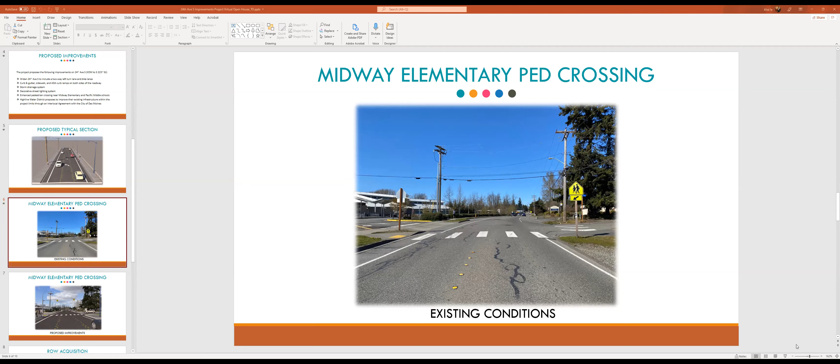Yeah, I just want to see if my headset is working. I'm trying to share my screen here, see if you can see it. Okay, see the PowerPoint? Yep, looks good. Is it full screen now? Yes, it is. Cool.

Then let's try the other one. Can you see this one? Yep, looks good. This one, I'm not sure what to talk about.

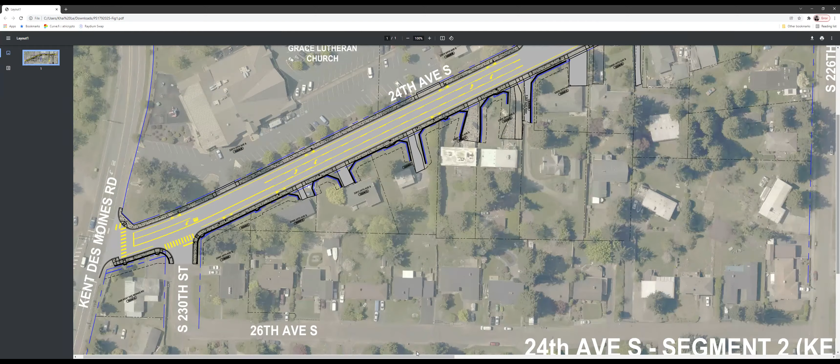Just kind of give a brief overview. Highlight the new channelization, sidewalks, show where we're putting walls and tying into the proposed tie-ins for driveways, at least for now. The driveways are pretty preliminary at this point, but we'll also be working on the final grading, especially on that east side.

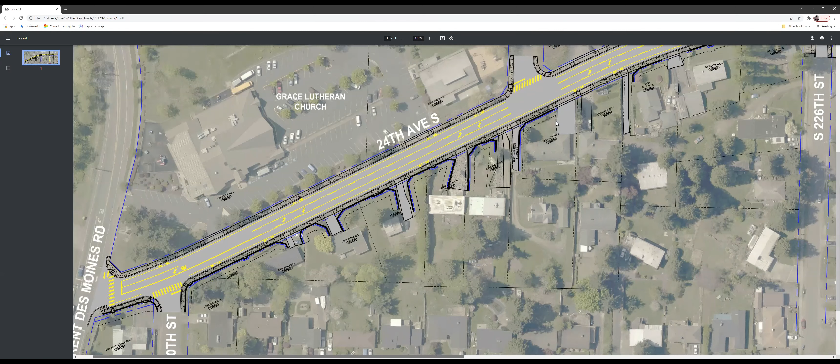I think the location of the sidewalk, we can tell people that it's approximately where the open ditch is right now. So I think all of the open ditch on the east side is going to be filled in. We'll give them an idea of where the new sidewalk on the east side is going to be.

Sounds good. Yep. It's gonna be really funny if nobody shows up. Yeah, that'll be interesting. We've been kind of preparing all of this for nothing. Well, we'll have it recorded and we'll do the presentation anyways and let it run. I think we'll have a couple show. Yeah, hopefully.

I think at some point we might have to do this again for council, kind of give them an update, just twist the presentation a little bit. Yeah, I can see that happening. Yeah.

We should have asked Bonnie if anybody had signed up. Right, because she would have had that, huh? Yeah, but we'll find out in a minute.

Do we have this time slot for just 1 hour or something like that? Yeah, 6 to 7. Okay, so if nobody shows up for a while, we'll just hang out and wait to see if we get anybody. If not, at 6:30 we'll give a presentation that can be recorded and then just hang out the rest of the time. Sounds good.

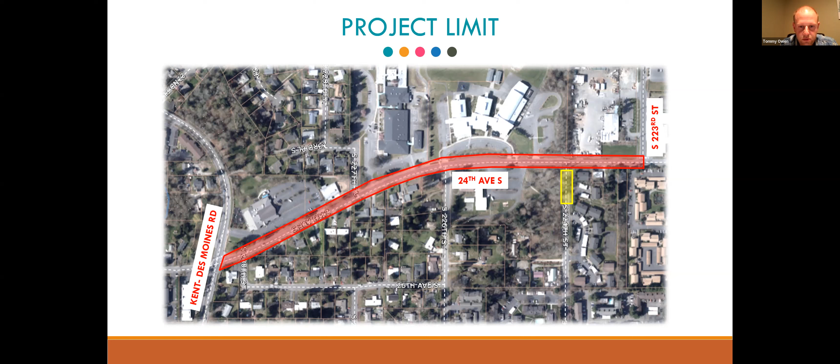Some of the proposed improvements along the 24th corridor: we'd be widening 24th Avenue to include a two-way left turn lane and bike lanes. In addition, there'll be curb, gutter, and sidewalk on both sides of the roadway, as well as improving all the currently non-ADA curb ramps, bringing them up to ADA standards.

The storm drainage system will be improved throughout the project. We've had some issues in the past with flooding along this corridor, so hopefully this will alleviate some of those concerns. We'll also be doing some decorative street lighting—right now the proposal is to place it on the east side of 24th. Hopefully you've noticed throughout the city we've done decorative street lighting in other locations, mostly the blue poles you'll see throughout the city, and we want to mimic that so it identifies as the City of Des Moines decorative system.

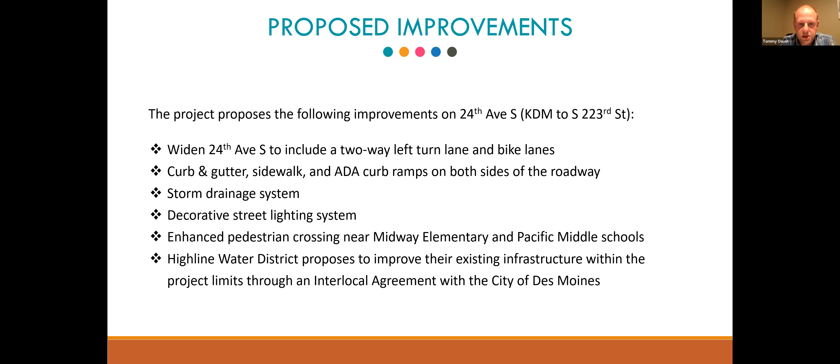We'll also be enhancing pedestrian crossings near Midway Elementary and Pacific Middle Schools, and I'll come back to that in a minute with some graphics we have. The Highline Water District will also be improving some existing facilities within the project limits. We're working on a partnership with them through an interlocal agreement so they can improve their facilities as part of the project.

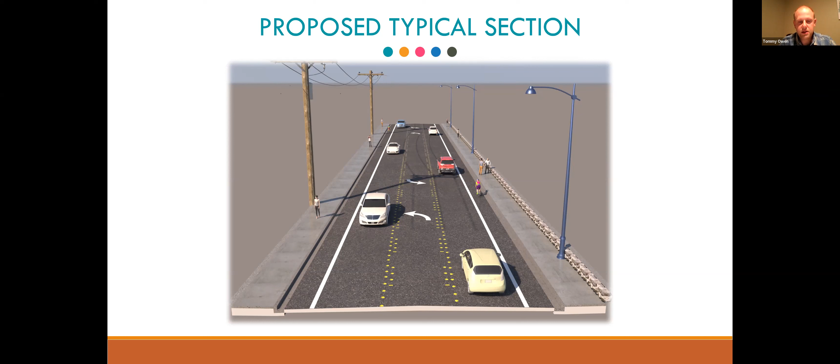Behind that street lighting, you also see we've shown some walls in this graphic. We'll be needing to construct some walls, especially on the east side of the roadway, to basically squeeze all this within the right of way. We've also got bike lanes and the two-way left turn lane, so that should be helpful.

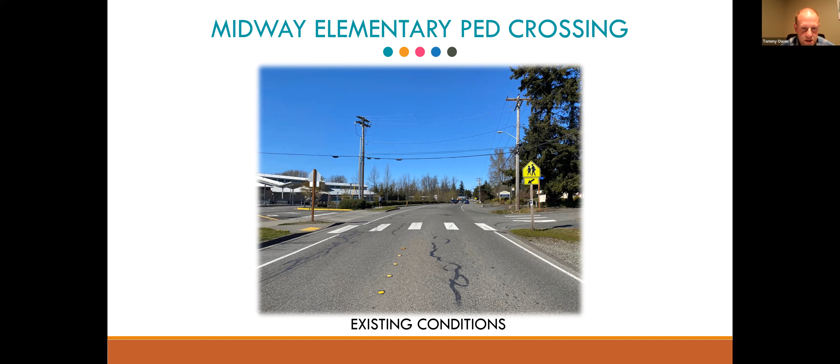We'll also be doing something similar at the mid-block crossing to the north, which is right now in front of the elementary school that goes across to the church. That will basically look exactly the same as this, and it'll also be a raised concrete crossing there as well.

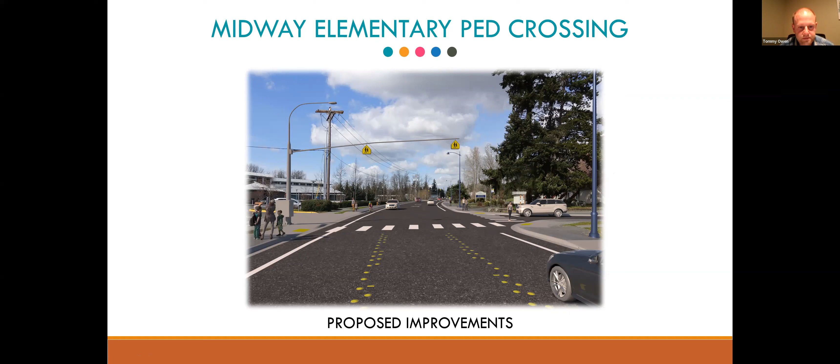Right now, where the city's at is we are wrapping up the 90% plans on this, and we've identified locations where we'll need to acquire permanent easements and temporary construction easements in order to construct all the improvements within the right of way.

Here's a good example. This picture was taken on 216th, just west of 11th Avenue. You can see we've got the decorative street lighting, and the wall curves behind that street light. You'll see something similar on 24th Avenue. To accomplish this and squeeze everything into the right of way, we'll be working with property owners, specifically on the east side of 24th, to gain those easements.

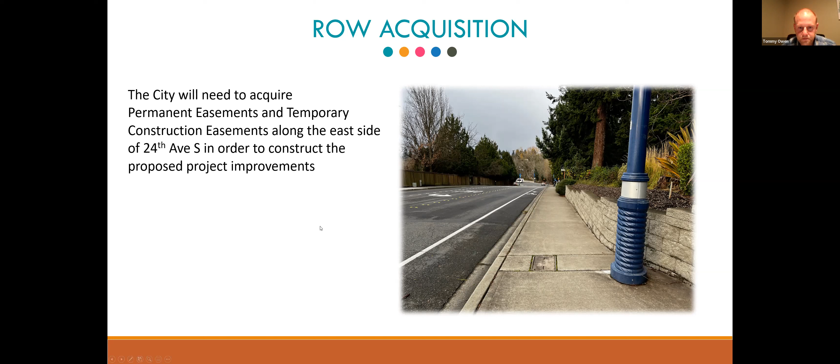So the project timeline: we've already completed 30% design. We're currently working with all the franchise utilities to sort out a lot of utility conflicts. This has been a tough project with the sheer number of utilities underneath the ground in this corridor, and aerially as well. It's been a difficult one. There's a few duct banks, water, sewer, stormwater—a lot of stuff underneath the ground in this corridor that's been difficult to work through. That is ongoing right now, and we're working through it as best as we can.

As I mentioned earlier, the 90% design is almost wrapped up. We should have that in early January. Then we'll be needing to do right-of-way acquisitions, or temporary and permanent easements for the right-of-way, and that will start in early 2022, with the goal of construction in summer of 2022. So on that, I'll turn it over to Khai. We've got a roll plot that'll show where we're at with our current design.

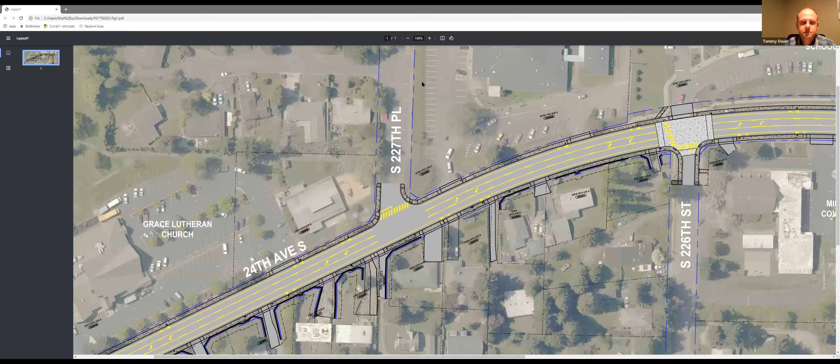So this roll plot here is basically an aerial map with a more detailed layout of the improvements from the 24th Avenue project. Let me zoom out here a little bit to show the project's limits. It's going from Kent-Des Moines Road to 223rd.

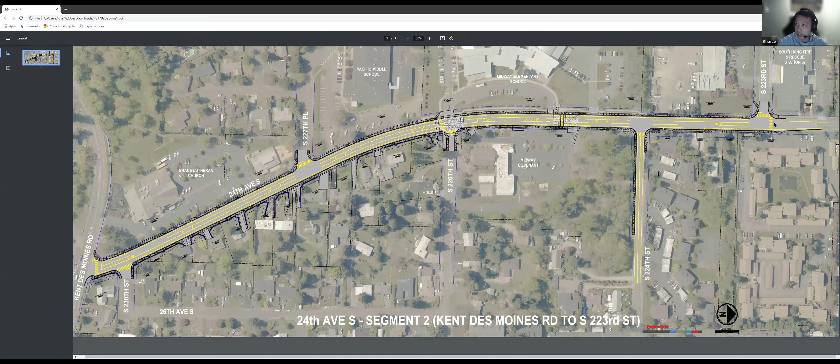These are the raised, enhanced crosswalks that Tommy was talking about. One is at the intersection of South 226th and 24th, and the other is a mid-block crossing just north of Midway Elementary School.

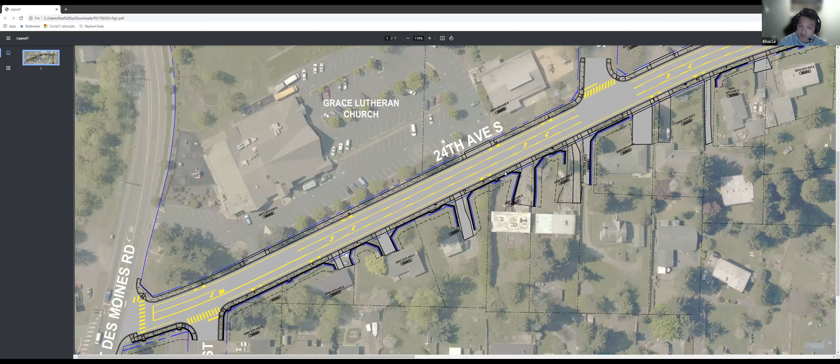Kind of zoom in a little bit here. I want to show the cross section we're proposing for 24th Avenue South, with an added two-way left turn lane, new bike lane, curb, gutter, and sidewalk on both sides of the roadway. The location of the sidewalk on the east side here is approximately where we have open ditches along the east side of 24th Avenue right now—just to give you an idea of where the new sidewalk is going to be located.

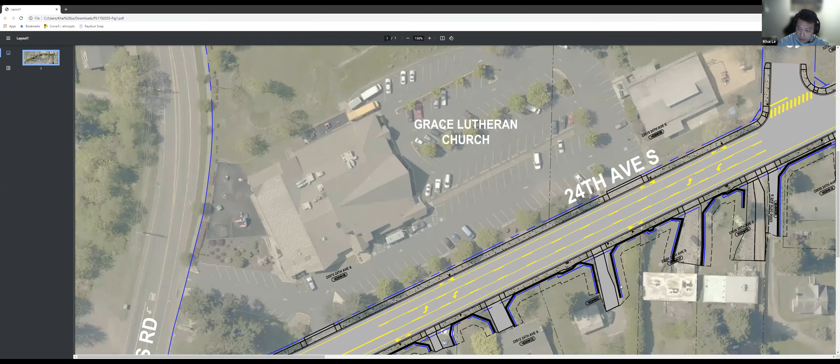These bolded black lines here are the proposed location of the retaining wall, which is going to be on the east side.

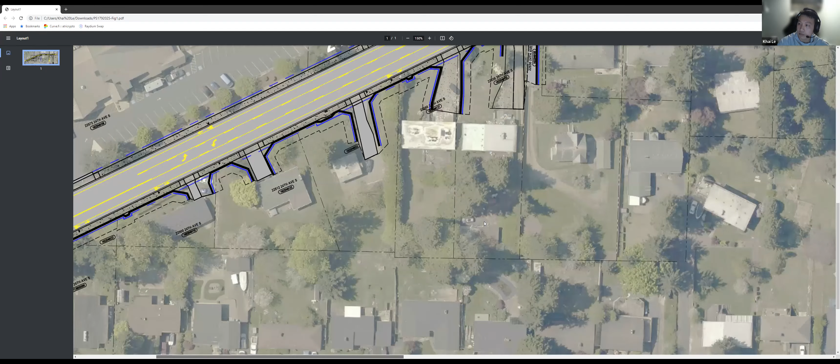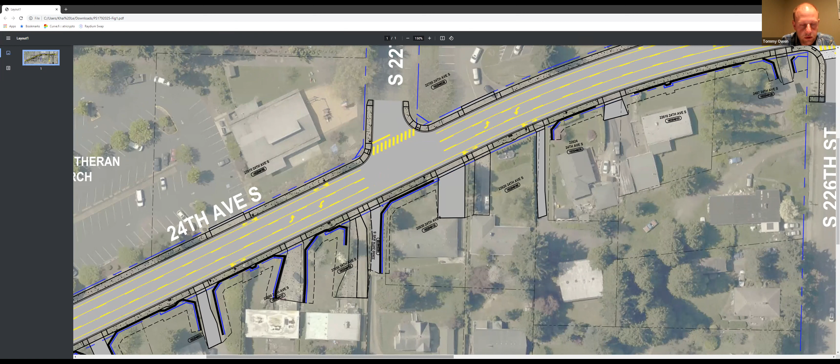I'll jump in here for a second. We'll be doing a mix of grading and walls to fit this within the right of way. What we've run up against, especially on the east side of 24th, is fairly steep slopes. So in order to make all that work with these needed improvements, we'll need walls as well as grading. If you're a property owner, especially on the east side of 24th, we'll likely be getting in contact with you. We'll be out there, willing to meet with anybody in the field to help understand where these improvements will be and what we're looking at moving forward.

So again, this is just a pretty preliminary look, especially at the driveways along the east side of this corridor. So yeah.

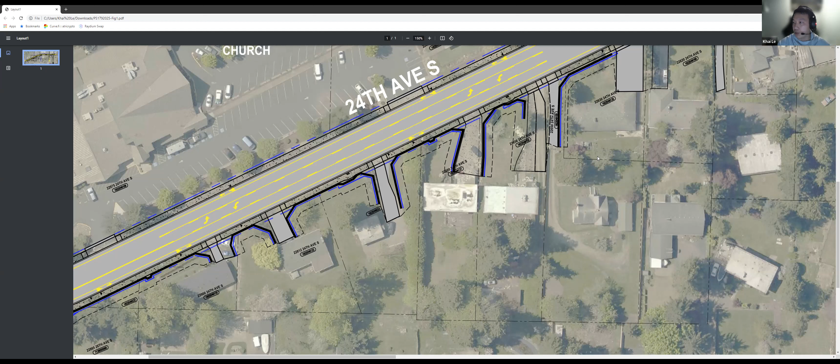With that, I think we would like to open up for any questions you might have. I have a question, yeah sure.

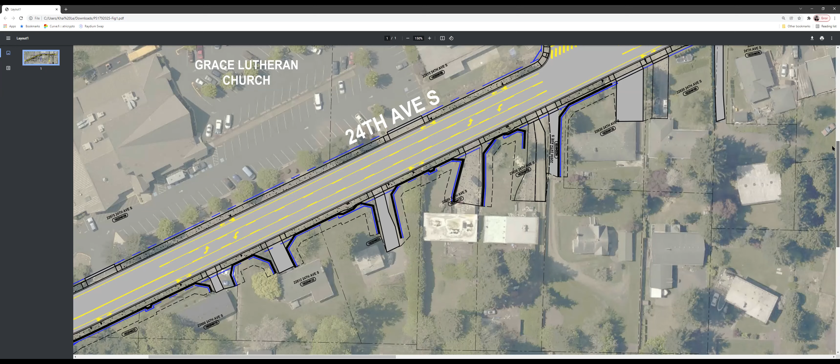My name is Hans Pon. I'm a board member at Grace Lutheran Church. Currently there is some street parking on the west side of 24th Avenue, just to the east of the church parking lot. Will that street parking be eliminated?

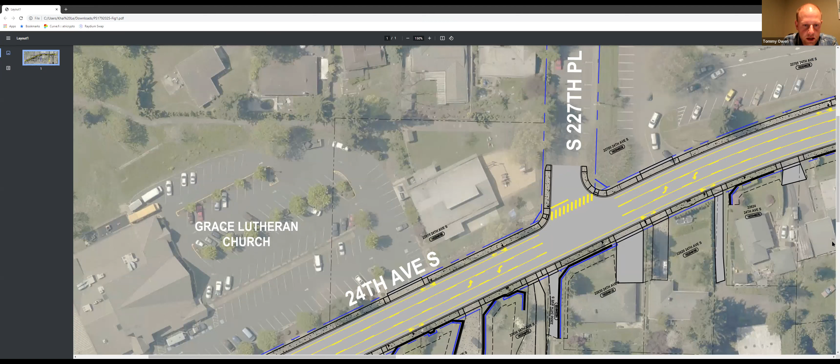Yes, that will be eliminated as part of the project. In order to facilitate the widening of 24th, the bike lanes, and the sidewalk there, we'll need to remove that parking.

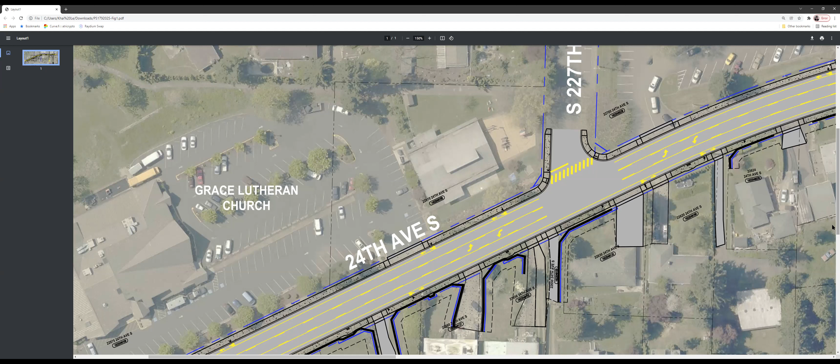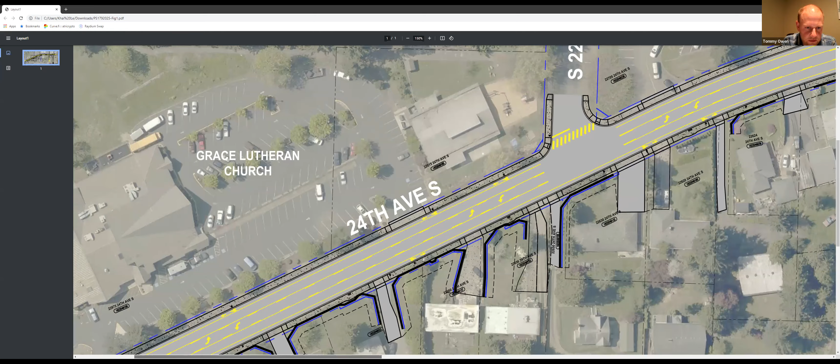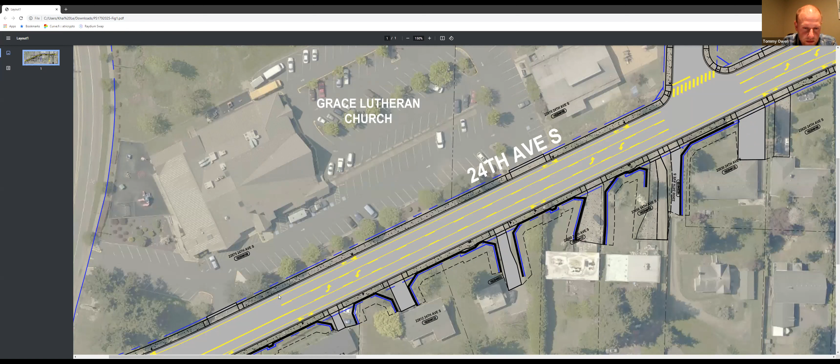Will any of the new right-of-ways affect the parking lot of the church? Looking at the roll plot here, and from what I'm familiar with, I don't see any impacts there. I do know there's a row of trees between the parking lot and 24th Avenue, and as part of PSE's relocation of their aerial facilities, those trees could be impacted, but that's really up to PSE. I'm guessing they'll be reaching out to you in the near future to discuss that.

One of our concerns is there are two driveways entering the church parking lot, and they're already fairly steep. If the road is widened at those points, will there be some mitigation of the steepness of those driveways?

Understood. I don't specifically know how those driveways will look with the project. What I will do is jot that down and work with our design engineer to take a close look at those driveways. Okay, thank you. Yep, thank you.

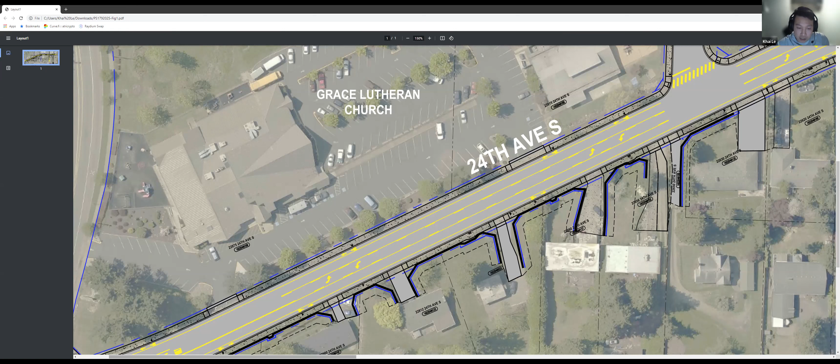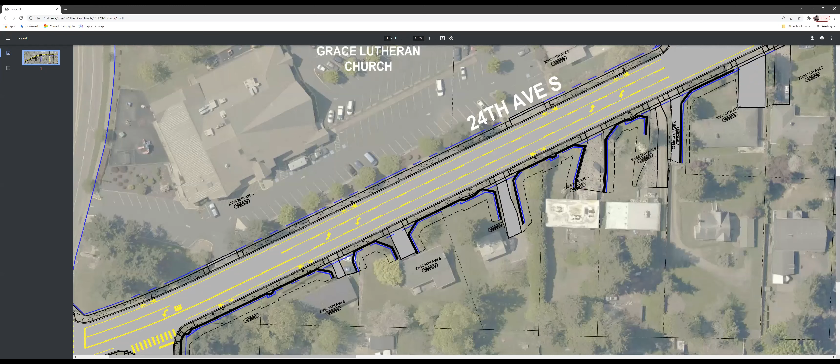My name's Shannon. I have a couple of questions as well. We live in the neighborhood across Kent Des Moines from here. One of my questions is, I know this starts at 24th at Kent Des Moines Road, but is there any thought to pedestrian improvement for the students who have to cross Kent Des Moines Road to go to the middle school, for example, who are walking? I don't know if there's any plan to address that intersection more broadly.

And then my second question, which may or may not be the appropriate forum, but it's frustrating when I see full-size semi trucks traveling down this stretch of road instead of catching it at 216th. I don't think they belong here because this is a neighborhood. So I don't know if there's a way to sign this stretch so the semis stay out of it. They don't belong here.

Understood on the semis, I'll take a look into that. That may be something that we can look into. That would be great, we've had some similar issues before. I'll make another note on that and look into it.

As to your question on Kent Des Moines Road, these improvements will address the curb ramps on the north side of Kent Des Moines Road. We aren't doing any improvements on the south side. One of the main reasons is future plans for Kent Des Moines Road show some significant improvements as part of a separate project, and at that point that's when we would want to do improvements. We don't want to do any improvements on the south side that may have to be rebuilt just years down the road.

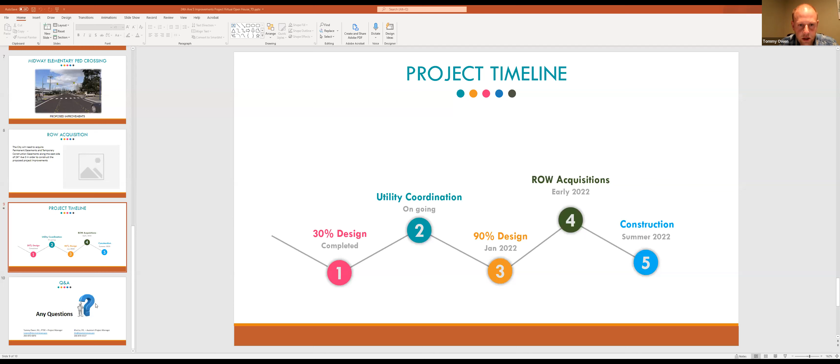Can you share your email contact information so that if we have questions later, we can address them directly to you? Sure, let me bring that up. Also be sure to check the website where you accessed this meeting, it has our contact information as well, and we'll keep it updated throughout the project so you can see where things currently stand.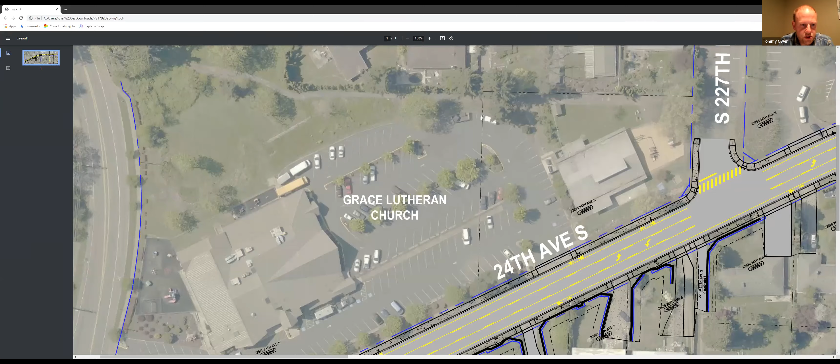Maybe we can go back to the roll plot. I know the drainage in the area shown right now mostly goes down to Kent Des Moines.

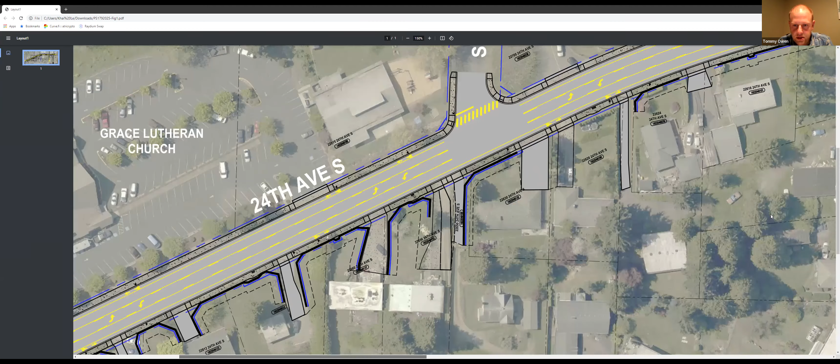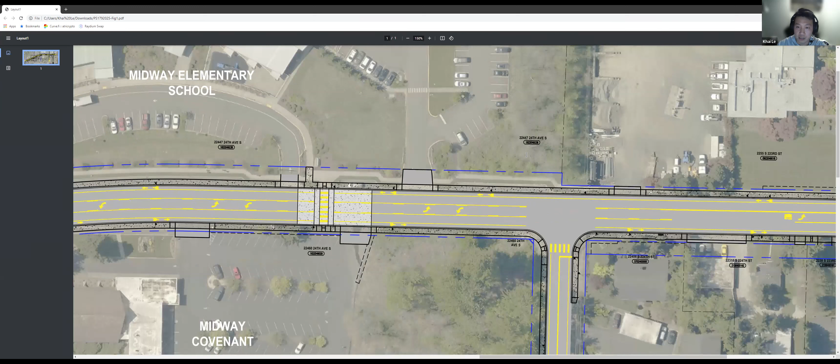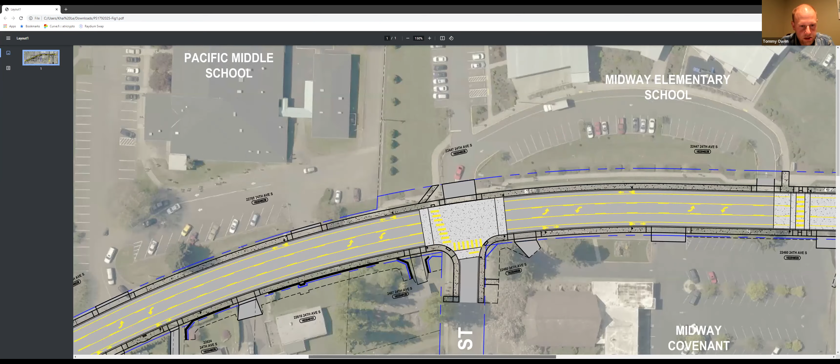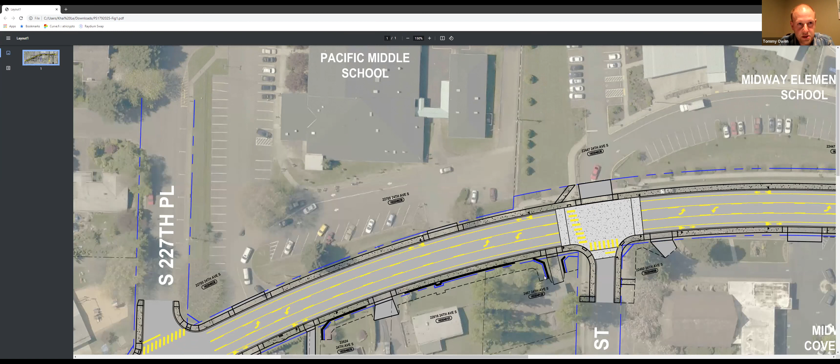Everywhere north of 227 is going to be in a main trunk line that runs on the east side of 24th, and there's an existing crossing further south at 227 that was put in years ago that will connect into it. So that trunk line runs across 24th and eventually makes its way down into the drainage along Kent Des Moines Road. Then on the very north end of the project, that drainage runs down 223rd.

So this may seem a little out there, but does any of that have any impact on any active streams in the area? I'd have to get back to you on that.

So what we've done is a TIR, which looks at the drainage, and our stormwater department took a look at that and they were comfortable with the plans here. These stormwater improvements have also been identified in this comprehensive stormwater plan, and we're just implementing those projects as a part of our project. Okay, yeah, thank you, sir.

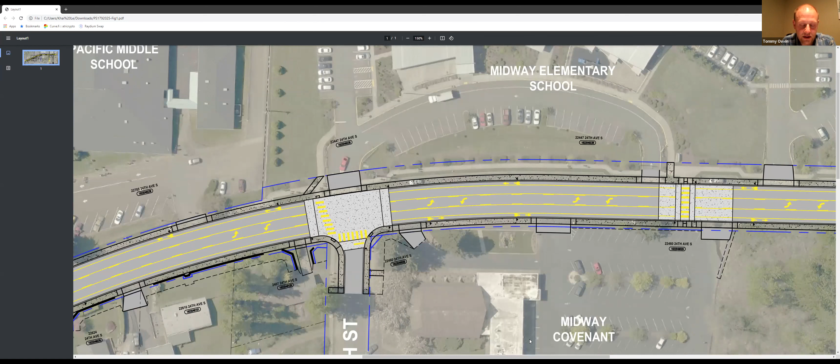Excuse me, sorry, I missed the first part of the meeting, but has there been any indication from the Highline School District as to ingress and egress that is going to be required for the rebuilt Pacific Middle School? Yeah, so that's a great question. I've been working with a couple of representatives from the school district for the last couple of years now. I know that they proposed basically a full rebuild of Pacific Middle School.

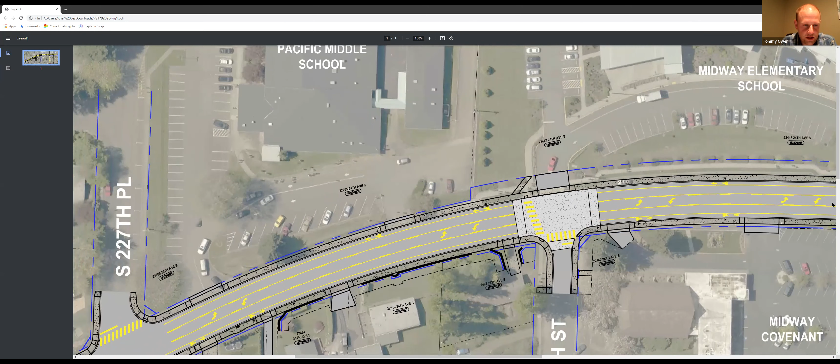Maybe Khai, go a little south on your roll plot there. As far as my understanding, there's going to be some substantial layout changes, especially of their parking lot. I was hoping to work on a partnership with the school district to try and incorporate some of those layout changes with the project. But my understanding is their project there at Pacific Middle School has kind of been put on hold, or they're in delay, so at this time they're just not at the point where they could partner with us for some of their on-site improvements.

So we've had to just push forward with our project. What we're showing now is just basically tying into the existing driveways. When the school does redevelop in the future, they would be required to adjust the sidewalk and the driveways to fit with their revised layout. So their plans are not advanced enough at this point that they have any idea what they're going to do at the site? I think they do, but we wouldn't be able to incorporate their driveway locations and have interim use with their existing layout. Thank you, yeah, thank you.

I do have another question, and I'm sorry, you may have answered this in the initial presentation, but there are utilities in this place. In this case, the electrical utilities will be above ground, they're not going to be buried, correct? Yeah, as a part of this project, the utilities will stay aerial. PSE has proposed moving most of their facilities onto the west side of 24th Avenue. There will still be some service poles on the east side, especially for a lot of the homes. But yes, that is correct.

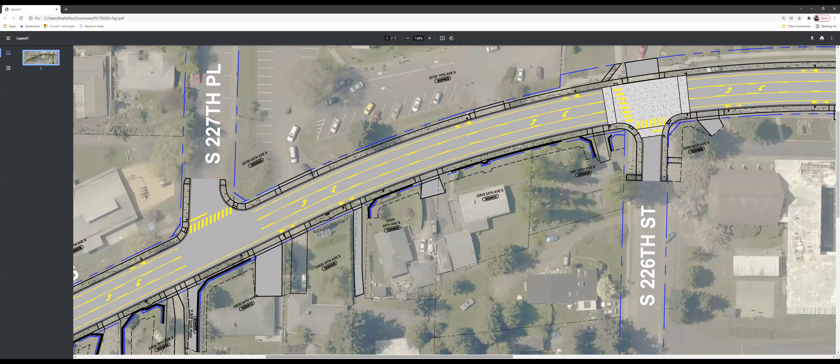Since we're here in a lull, I'll ask another question. I may have missed the original explanation, but will there be any improvements to the left turn signal coming off of Kent Des Moines Road onto 24th? Several residents have screamed literally, we need a left turn signal there.

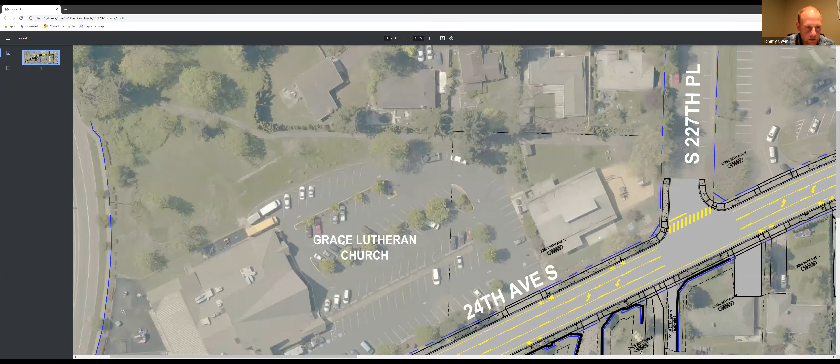At 24th and Kent Des Moines Road. Hopefully Kai, you can bring that up. As part of the project, we'll be adding a left turn pocket there with associated improvements to the signal to provide a left turn at that intersection. This is for the left turn off of Kent Des Moines Road eastbound onto 24th. This project will provide a left turn pocket going southbound on 24th, and then eastbound onto Kent Des Moines Road.

To eastbound on Kent Des Moines Road, but I'm referring to the other quadrant, coming east on Kent Des Moines Road to 24th, and then having a dedicated left turn signal to proceed onto 24th. Whereas right now, you wait for endless traffic to possibly break, and sometimes through a cycle, only one vehicle is able to get through.

I think I understand now. So there's not a protected left turn at Kent Des Moines Road onto northbound 24th. Yeah, that's something we can take a look into to see if that is warranted. Thank you.